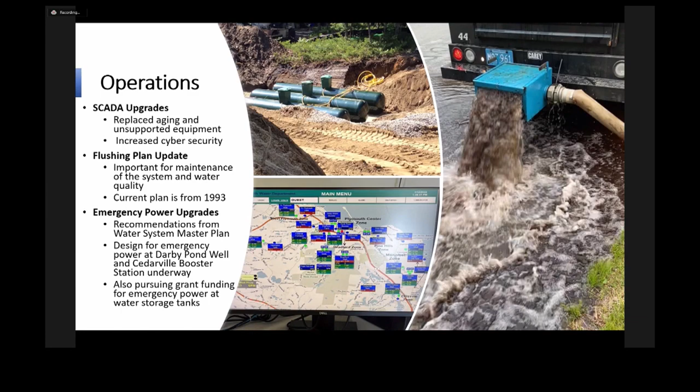I don't think infrastructure requires much of an explanation, but here are some of the ways we're improving and replacing it here in town.

A contract was awarded to a construction company called Dig-It in late November of 2021. This contract was for the replacement of the water mains on Doten Road and Winter Street. Doten Road suffered from frequent service interruptions due to the failing cast iron water main that was installed 90 years ago. The Winter Street main was recently discovered to be composed of material produced here in Plymouth over 100 years ago. This material is known as jacketed water main and is well beyond its useful life.

If you've ever heard of jacketed water main, you probably know of the issues we've had associated with it. Construction on Doten Road was completed in mid-December, and we're pretty happy with the work we got out of the Dig-It construction company out there. But Winter Street is going to have to wait until spring because it may require a bypass main, which has to be protected from freezing. This isn't something you can do in the winter.

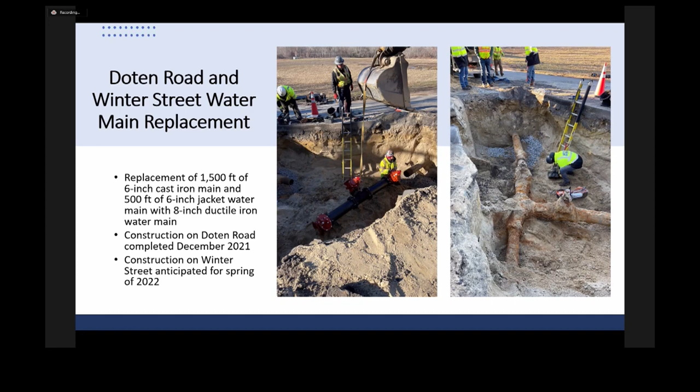We hope to have the tank filled and back in service sometime in early February. However, the cold weather prohibits the curing of the exterior coating, and the painting company is going to need to return in the spring to complete the project. The next tank scheduled for rehabilitation is the South Pine Hills tank. This is a concrete tank, so the process of rehabilitation is somewhat different, but this should take place somewhere around FY24 or FY25.

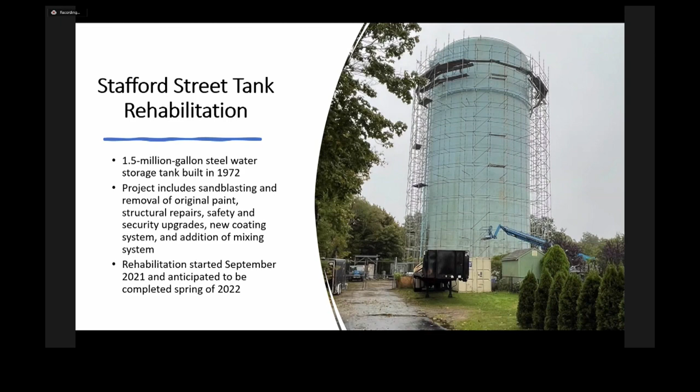As far as pump station upgrades go, a phased approach to upgrading the pumping stations was another recommendation from the 2019 master plan. The planning and design stages for South Pond Wells and North Plymouth Well are complete, and construction should begin mid to late February 2022. Upgrades will include valving, new flow meters, upgraded chemical feed pumps, analyzers for pH, chlorine, you name it. Painting and sealing will happen in the buildings.

We hope to continue upgrades to Darby Pond Well, Ellisville Well, and the Pine Hills Booster Station later in 2022 or early in 2023. So we're really trying to bring our pump stations up to speed and make them more functional and more efficient. That's the whole idea behind these upgrades.

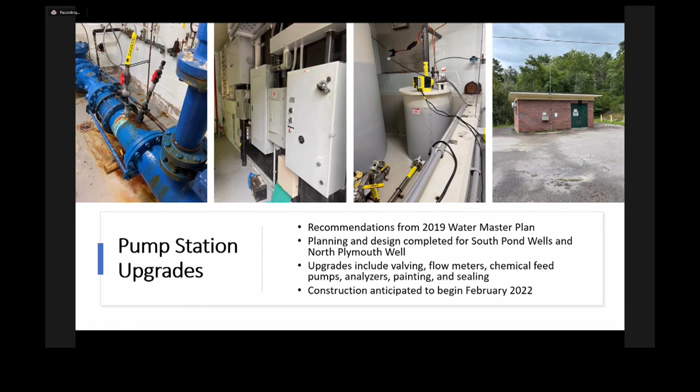There are two somewhat large water main projects on the horizon. One is the Federal Furnace and Hill Dale Water Main Project. The 2019 Water System Master Plan, developed by Environmental Partners, has been the driver for the majority of our capital improvement requests. The plan recommended a phased approach to replacing our asbestos cement water mains, and there are quite a few in our distribution system, so this is going to take a while — you've got to start somewhere.

The Water Division has submitted a capital request for about $5.2 million to replace the mains on Hill Dale and Federal Furnace Road. These water mains are comprised of asbestos cement main, which can become pretty brittle when saturated and can break easily. A lot of it is vinyl lined, and the vinyl lined asbestos cement can cause water quality concerns, which require bleeders.

The bleeders let water out of the main so it doesn't sit there too long — this is called reducing the water age in the pipe. There are two bleeders on Federal Furnace that collectively discharge slightly over 2 million gallons of water each year, and by replacing this main, we hope to not throw that 2 million gallons away. Replacement of this pipe would also reduce leaks on the town side, support improved water quality, prevent future risks of failure to the asbestos main, and do a lot of good things in terms of getting this out of our system and getting a better, newer pipe in.

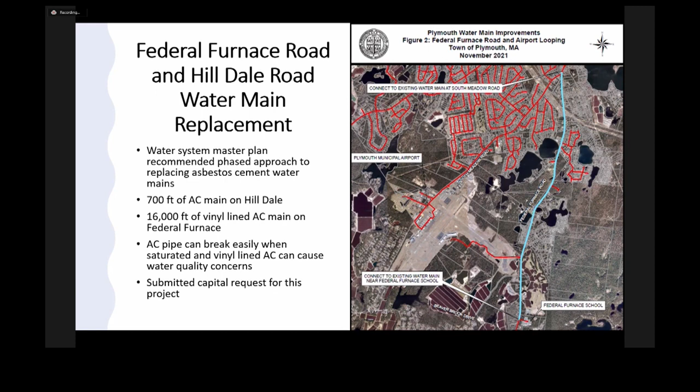The other water main project is the Manomet Pressure Zone pipe replacement project. After securing some EDA grant funding and appropriating additional funds at the spring annual town meeting of 2020, the town underwent a selection process for a consulting firm to engineer the Manomet Pressure Zone pipe upgrade project. There currently exist certain hydraulic deficiencies within the Manomet Pressure Zone relating to pressures and flows — flow restrictions from older or undersized water mains that experience high pressures during pumping cycles that fill the South Pine Hills tank.

These flow restrictions can also create lower pressures in parts of the zone where water is being drawn out. They limit the amount of water available for firefighting in portions of Manomet, and they cause the pump stations to use far more energy than they should to force water into that tank. The solution is to upsize the water mains on portions of Bartlett Road, Brook Road, Manomet Point Road, White Horse Road, and Rocky Hill Road.

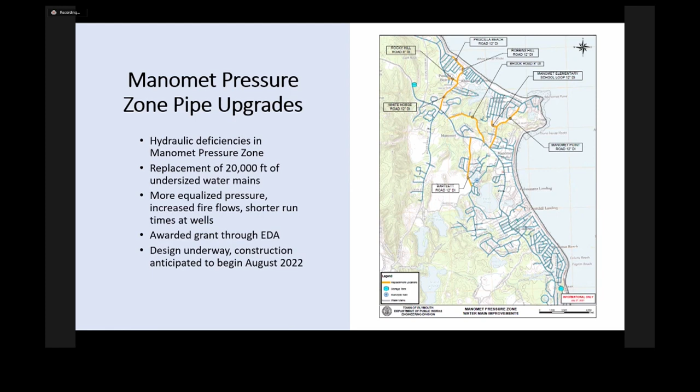Upsizing these pipes will lead to more equalized pressure throughout the zones, with no high or low pressure spikes. It will lead to shorter run times with the wells, which will actually equate to increased capacity within that zone in terms of how much water is available to us. This is a pretty sizable project, and while it's still in the design phase, it has a projected start date of August 27th, 2022. We're looking forward to the start of that project.

Moving on to new source exploration — Plymouth operates 13 wells on 11 sites. We institute seasonal outdoor watering restrictions as a condition of our Water Management Act withdrawal permit, and we always seek to promote conservation, as with the creation of the Water Conservation Committee. As a municipality, we're reasonably well supplied with water at this point. However, we do not have the surplus capacity to sustain the continued growth we've seen over the last 10 years or so. Even if growth were to slow significantly, our ability to supply water would require augmentation.

As the wells we currently operate age, they suffer from reduction in yield and water quality. Wells can only be redeveloped so many times before they suffer from diminished capacity. As a public water supplier, we have a responsibility to the ratepayers to assure that water will come out of the tap when it's open. To that end, it's prudent to identify new sources and develop them well in advance of actual need. The siting, construction, and permitting of a new source can take up to 10 years, so now is the time to identify a new source.

We have contracted the services of the Horsley Witten Group, including a very knowledgeable local hydrogeologist, to help identify potential sources.

Their tasks include things like GIS site screening, groundwater modeling, desktop analysis, and of course, field exploration, where we actually go out and put holes in the ground and find out how much water we can get out of it.

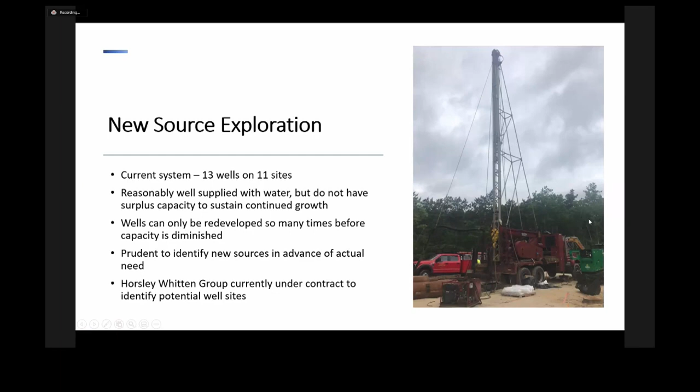And finally, we'll just talk for a second about the Water Conservation Committee. In the fall of 2020, the Select Board voted for the creation of a committee to explore ways to conserve water, promote the responsible use of the resource, and protect the sole source aquifer where we draw all our drinking water from. The first meeting of the Water Conservation Committee happened in early November of 2020, and the committee's been since working very diligently to create policies and practices.

The committee hopes to publish their findings in a document called the Town of Plymouth Water Conservation Plan. If the plan's successful, it will be a roadmap to reducing water production and consumption by as much as 15%, which is pretty significant over the next decade.

The DPW Water Division has been working closely with the committee to devise strategies. The committee has seen success in creating awareness, investigating and implementing conservation programs, and exploring public outreach.

Access to consumption data has been somewhat of a barrier to the research necessary for the creation of a meaningful conservation plan. The committee and the Water Division, as well as the DPW, continue to look for ways to quantify seasonal usage and maximize the conservation efforts.

And I applaud their efforts and look forward to continually working with them in the future. And that's about what's going on in water. I'd be happy to answer any questions if they exist.

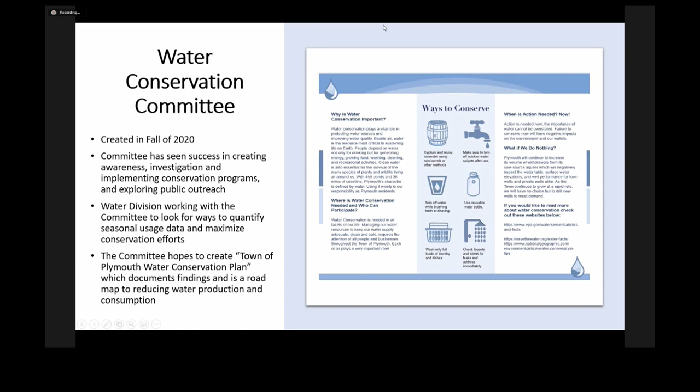Any questions for Peter? Mr. Gordon? If you think of something later, I'm available anytime. Well, I have a couple, not so fast.

I was listening to you, and the next well is 2027, if I understood it right. Do you have like a master plan in place or something so-called as we grow? You know, you have different sites up for water, and if you do, with places like the planning board, maybe the zoning board of appeals, even have these sections of town that are seriously seeing growth, like Red Brook, for instance, and stuff like that.

I mean, Red Brook being separate, I don't think we're going to put in a well anywhere near Red Brook because it's just so far from the municipal distribution system that it wouldn't make a ton of sense. The master plan did recommend that we continue looking for a new source, and while I said that we would probably approach town meeting in FY27 for funding, I think that's reasonably accurate. But even if we were to secure the funding in FY27, it would probably still be another 1.5 to 2 years or more before that well actually went into production. So I think the timeline is accurate.

I hope that Horsley Witten can help us site a new source that's in the appropriate pressure zone or in reasonable proximity to the distribution system, so that it doesn't include the installation of thousands of feet or, God forbid, miles of water main to connect it. But I hope that gets close to an approximation of an answer there, Davey.

Some of the regulatory things we have: we're working with Horsley Witten on a groundwater discharge. We've got a couple other regulatory things with sewer regs and fog regs, and we've got a CMOM. So those are a few of our regulatory things we're going to be talking about.

And then on the operations side, just like the water department, we have SCADA for monitoring. And then something we'll be working with our current operators on is a piece of equipment called the Greasezilla, which we'll get into.

Some of the infrastructure stuff, which I'm sure a lot of you are aware of, is the Water Street Interceptor, the flood barrier around the Water Street Pump Station, the Camelot Drive sewer extension, and also we're working out at the Plymouth Airport on the treatment plant that's out there.

So to get started with the groundwater discharge, like I said, we're working with Horsley Witten. The treatment plant right now treats an average of 1.5 million gallons a day. We're permitted to discharge out to the bay 1.75 million gallons a day.

Out the outfall down near Water Street. So what we're doing now is looking into permitting a groundwater discharge and what that impact would be if we had to do that on a more permanent basis. We have monitoring wells out there that we sample quarterly, and we'll look at what the nitrogen and phosphorus impact would be if we had to go to groundwater discharge permit only, and what that impact would be not only to that area but to places like the Eel River and the surrounding areas.

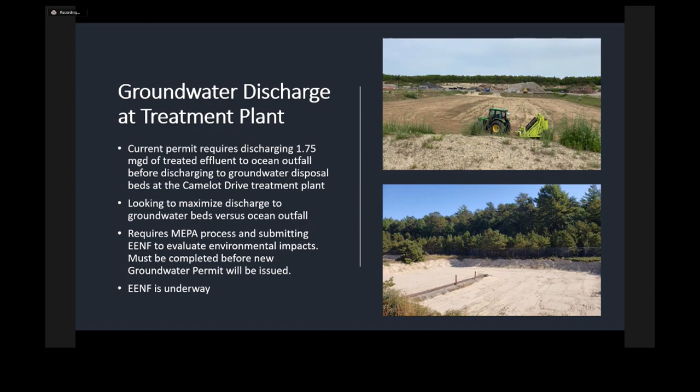Then after that, we have the fog program. Currently Kendra and I are working on a fog program and the sewer regulations. Fog is fats, oils, and grease, and not just Plymouth—a lot of municipalities are having trouble with grease. The SBR, you can see from the photo on the slide, gets a lot of fats, oils, and grease that float on the top, and that impacts the treatment plant and our process.

So we're going to try to come up with a better program for cleaning the collection system and doing monitoring at the plant. Another thing I'll be talking about is the Greasezilla—that's another possibility to reduce the fats, oils, and grease that come into the plant.

We take about an average of up to 100,000 gallons a day of septage. That septage could be loaded with grease, could come from restaurants, homeowners, residential, commercial areas, and that's introduced into the plant besides the flow that we get from the towns. This definitely impacts the treatment plant and our effluent, and just like a lot of other municipalities, we have to try to do our best to regulate it and get it under control.

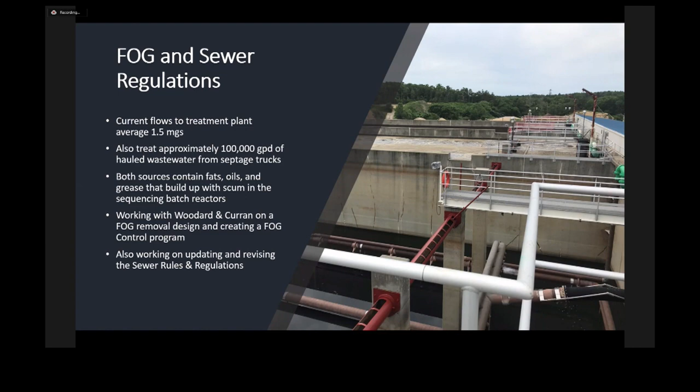The CMOM project ties in with the fog as well. We go out, we clean, jet rod, clean, power wash, if you will, all your collection systems, which carries wastewater to our lift stations, which ultimately pumps to the treatment plant. So we'll clean these, we CCTV those, we're monitoring not just for grease and things like that, but also for disrepair and what we need to do, whether it be lining or spot repairs, to address these issues.

Plymouth is, as we know, very old, and just like its water system, the sewer system is very old. We do this as preventive maintenance. So we do this project, we see where we can line and possibly prolong, whether it be a sewer main or lateral or manhole, and we also get out there and inspect manholes, do those repairs, things like that. So it's a big part of a healthy collection system, and if you have a healthy collection system, you'll have a healthy plant. When you have a healthy treatment plant, it helps us make permit and things like that.

But this is part of a requirement to the EPA. This is going to be a program that we're starting over. I believe in 2017 it was finished, and every 5 years we have to update that. We do about 60 miles of the sewer system. We've got 1,500 manholes that we'll re-inspect and reevaluate, and hopefully we can get some of these repairs done and update some of this in town.

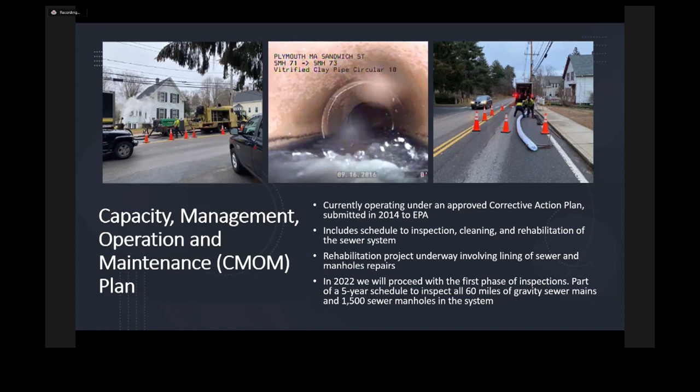Moving on to the SCADA system. Just like Pete, we use the SCADA system to monitor pumps and chemicals, pH, pressures. We can log on remotely to make changes, tank levels. It's important for infrastructure. We're going to be replacing a lot of outdated communications and bringing in the SCADA system, and we're working with Woodard and Curran on this project.

It's very similar to the water system. We have a two-part login for security, if you want to log on remotely from home, but really it's just bringing the system updated for security and getting rid of outdated equipment, upgrading the treatment plant and the pump stations, and just trying to modify and increase the security and do a better job with monitoring and be able to make changes remotely and things like that. That's where we're at right now.

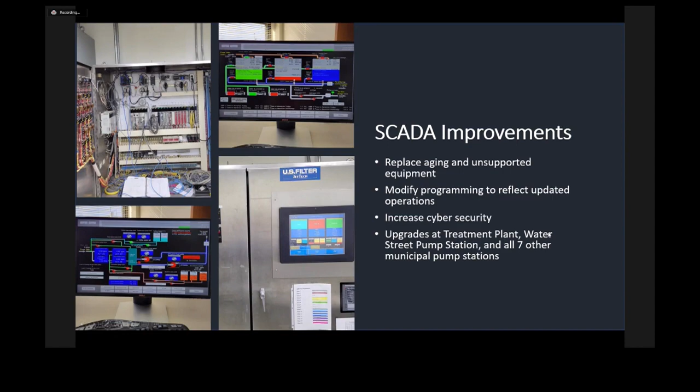What's next? So next on my presentation is Greasezilla. This project, we're working with Woodard and Curran. It's going to be funded by Woodard and Curran, and we're hopefully looking at revenue, not only bringing in and accepting grease with this program, but even possibly matching some of those rates with our septic receiving.

Right now, we charge 6 cents per gallon for septic, and I believe it's 8 cents for sludge. I think that with the grease, with this program, we could be expecting maybe 12 to 15 cents. So we'll probably have to bring the two closer together, so one's not trying to pass grease into a cheaper revenue stream. I think it's going to bring revenue because we'll be accepting grease from restaurants and things like that to help the plant, help the community, and help the collection system. It's going to be revenue for the town, and not only will it be revenue by accepting grease from haulers and other companies, but it's also going to help us bring up our septic cost as well.

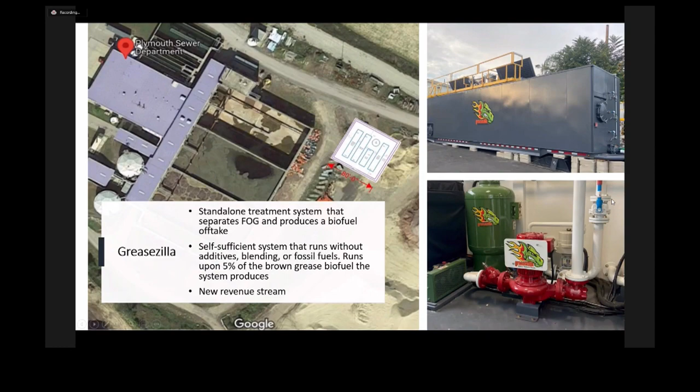That moves us on to some infrastructure. Water Street - I wasn't here the last time, obviously, but I know that there was some issues. I think that we've kind of learned from that, and we're going to move on and get that sewer main off the beach there and up into Water Street.

It's about 1,300 feet of gravity sewer. We're looking at a few different options - the micro tunneling and the conventional trenching. So part of this project is bringing the main up onto Water Street and abandoning the one that's on the beach there on the intercoastal.

We're in the process of this project right now, and we're expected to hopefully finish by fall of this year. And this is an exciting project. I'm kind of hoping that we lean towards the micro tunneling. I think that'd be the safest way to go, and most interesting way to go.

But if we did something like that, we could be a 30-inch main, could be about 20 feet deep, which we all know that there was some water issues down there with the aquifer. So I'm hoping that this project will go smoothly, but it's exciting. It's good stuff. It's good stuff to get that off the beach there.

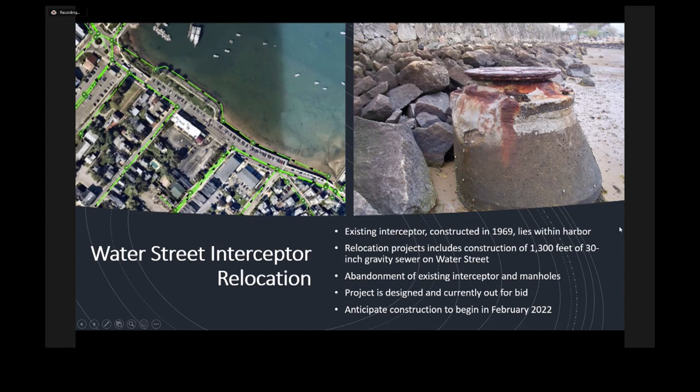And then the next project that we have is the flood wall around the pump station there on Water Street. They just finished up a big rehab, part of that new force main. They rehabbed this station, and this is the pump station in town. All the area pump stations flow to this one pump station, and this is what feeds the treatment plant. This is a very important building and part of the infrastructure of Plymouth. So this is going to be a very important project.

Ultimately, what we're looking at doing is putting a flood barrier wall around this building. It's under design, but based on the Water Street pump station and the proximity to the harbor, with the flood zone - like I said, it's under design right now, so we're not sure what the height is actually going to be, but it's going to be what's best to protect the lift station. It's another important project that we got going on.

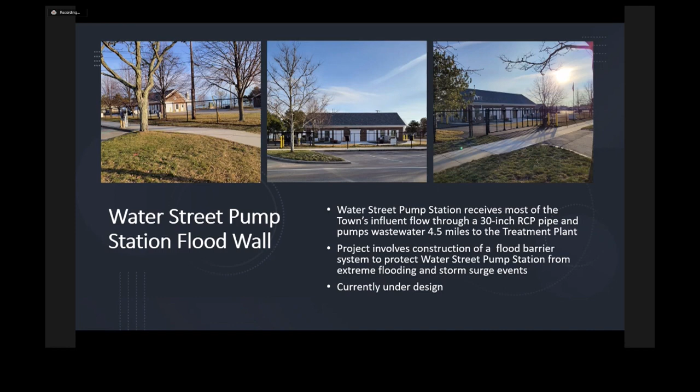What else? Oh, the Camelot Drive. Yeah, Camelot Drive, that's the sewer extension over there on Camelot Drive. This project will sewer that whole area, 30 commercial buildings, industrial properties of Camelot Drive. It's about a 1 mile of gravity sewer and some force main.

This is part of the infrastructure and sewer expansion. Unlike the water department, where the town of Plymouth has a lot of water connections, the sewer department is a lot smaller, and this is part of bringing in more revenue for the town and betterment. We'll have a new pump station that will take all the flow in this area, and it will supply the new sewer service for the 30 properties that we have over here.

And we're working with Woodard on this project, and we're actually reviewing design and the completion and bidding of the design is nearly complete. So this is another interesting project. We have an old lift station there - geez, I lost my train of thought.

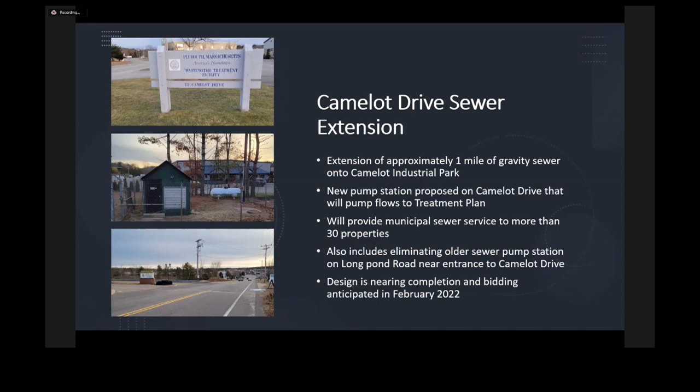The Plymouth Airport - this treatment plant is 20 years old. I've seen some pretty bad treatment plants, and for the age of this treatment plant, it's seen better days. It's really outdated, it's not efficient. All the equipment is worn, and it's kind of just hung together with shoestring. But we got it operating.

We got it, it's making permit. Right now we're working with Beta Engineering Group to help us renew the permit and design a new treatment plant over there for the Plymouth Airport and those 2 lift stations. There's 2 lift stations out there in the plaza. Construction, hopefully by the end of the year.

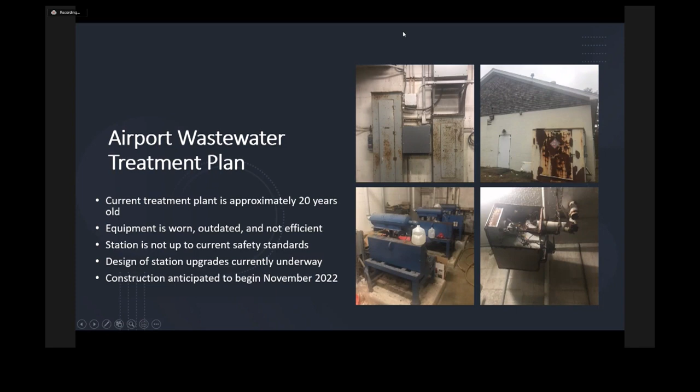And this is the last project, one of the last projects that we're working on. If you have any questions, I mean, I didn't do as well as Pete. Pete did a great job, but hopefully that was a little summary of some of the things that we got going on. Any questions you might have now or later on? If I don't know, I'll try to find out and get you the answers you need.

Any questions or comments from the board? Harry? Doug, you did great, don't worry about that. Thanks, Harry.

On the airport replacement - Doug, JB, I know that there were thoughts around because we would have a new station with increased capacity to possibly expand the sewer system to commercial properties on the other side of Federal Furnace Road. I was kind of wondering - not Federal Furnace, rather, sorry about that - I was kind of wondering, has there been any discussion on that?

I'll take that. I'll take that, Doug.

Yeah, Harry. Sheila, Kendra, Doug, and I have met, and the goal right now, as you all know, is that town meeting appropriated funding for the design of the wastewater treatment facility. It's in really rough shape. As we move forward with that design, we've secured ARPA funding for the full rehab of that facility, and all of those things are going along perfectly.